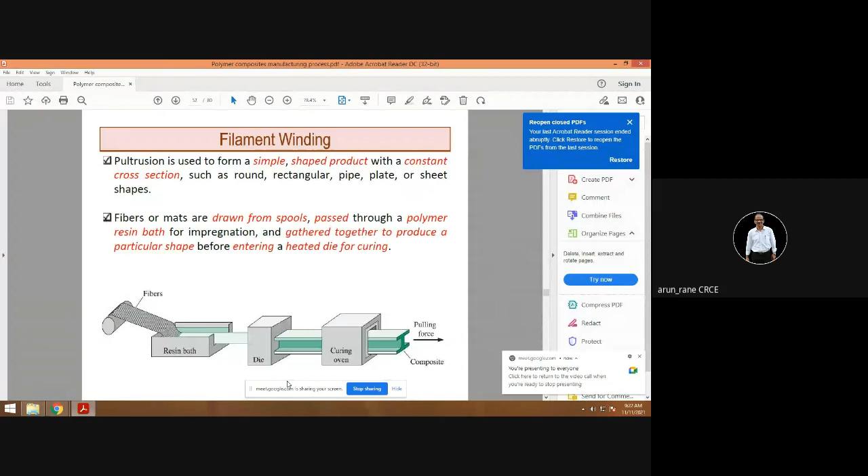Next is composites manufacturing. The process is pultrusion, which is a kind of extrusion process. The curing, that is setting up of the resin, is done almost immediately. So a continuous product, like an I-beam, can be made, since curing happens immediately or almost simultaneously. This process is called pultrusion, meaning pulled and extruded. It can subsequently be formed into any complicated shapes.

What is the raw material? The raw material is nothing but composite fiber. That is the raw material.

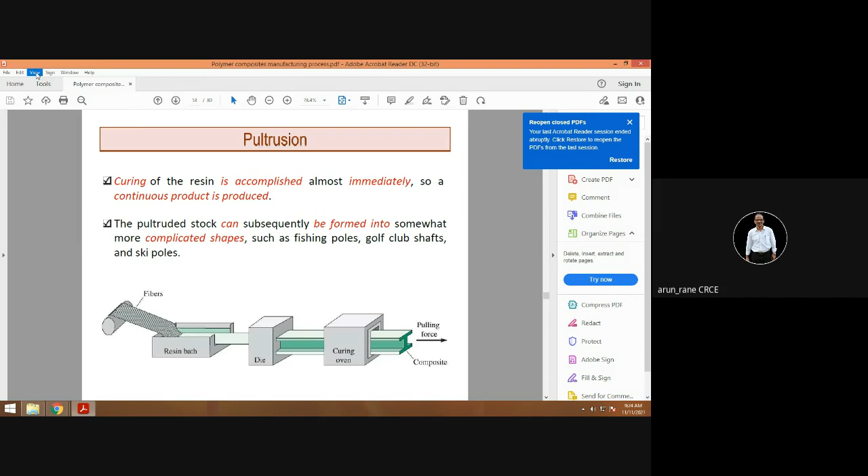Basically, it is a low cost and high volume manufacturing process, similar to the metal extrusion process. Somebody wants to join. It is a pull type of extrusion where the material is pulled, and it is basically employed for mass production.

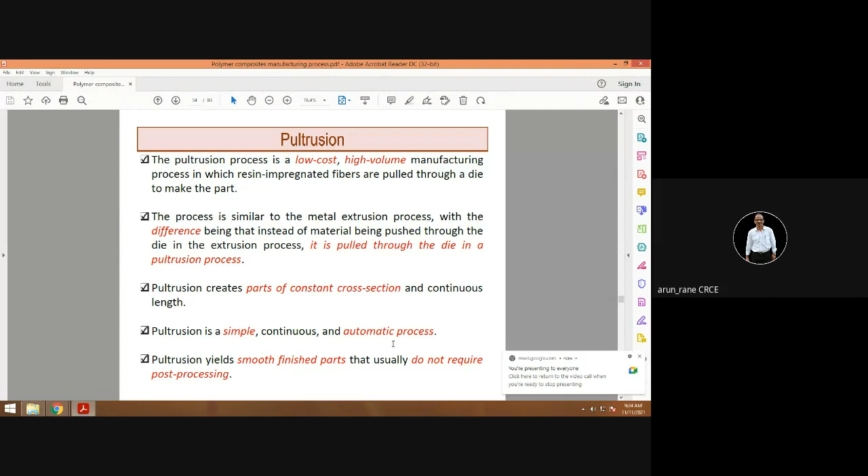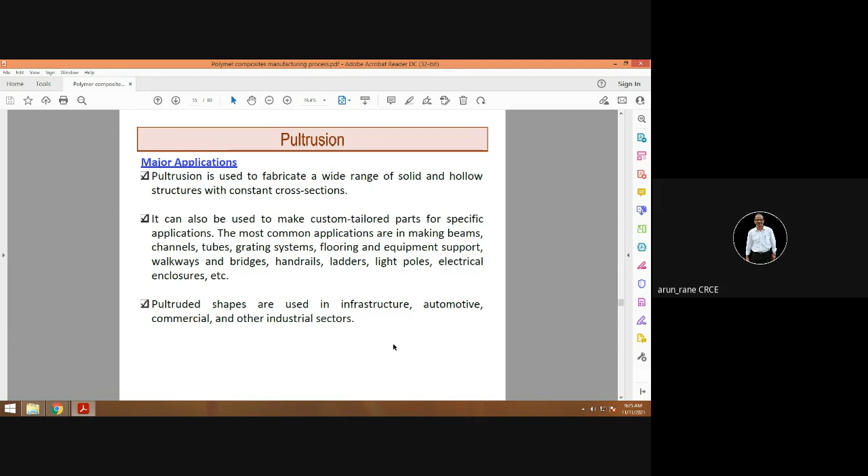Its applications are mainly what we are discussing, all the techniques we covered in the last lecture and today's lecture, for manufacturing of composites. Composite manufacturing means mixing two or more metal or metallic powders to get a hybrid material which is superior, having properties better than the parent metal. So it's a combination of two or three different metals.

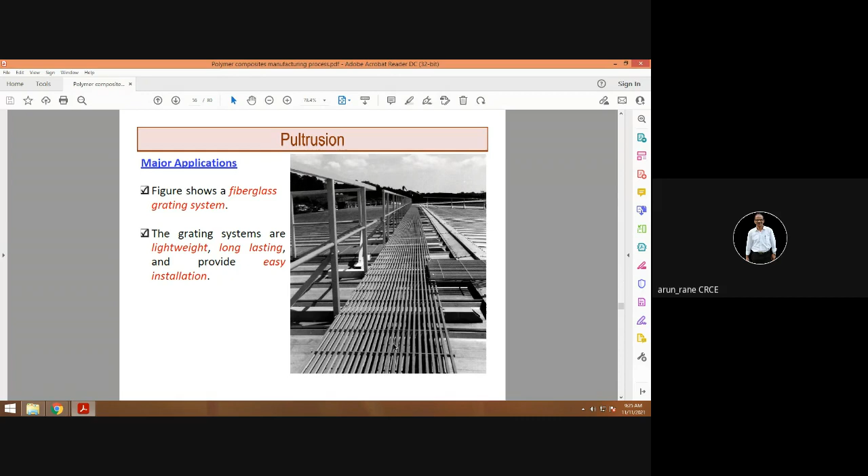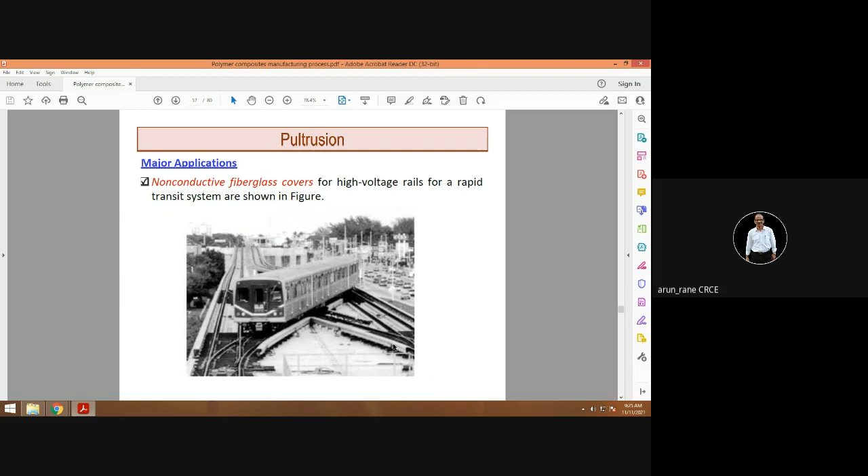This is what is called the grating system. This is a pultruded product from composite fibers. Fiberglass covers are also made by the pultrusion process, and it is non-conductive.

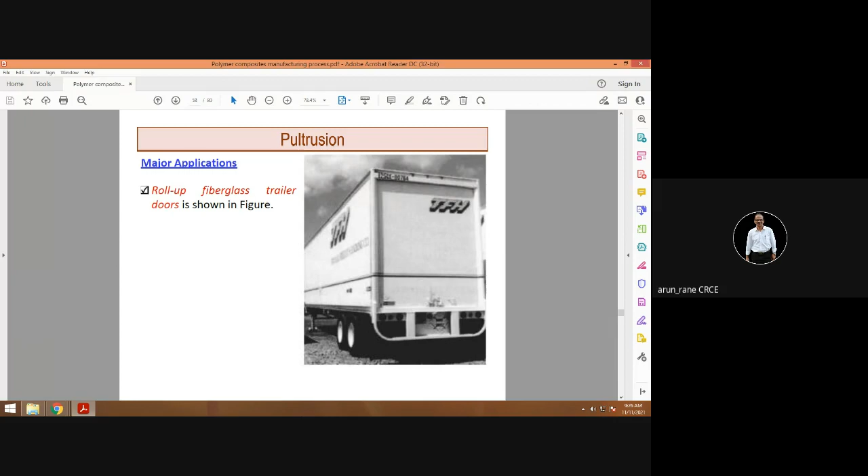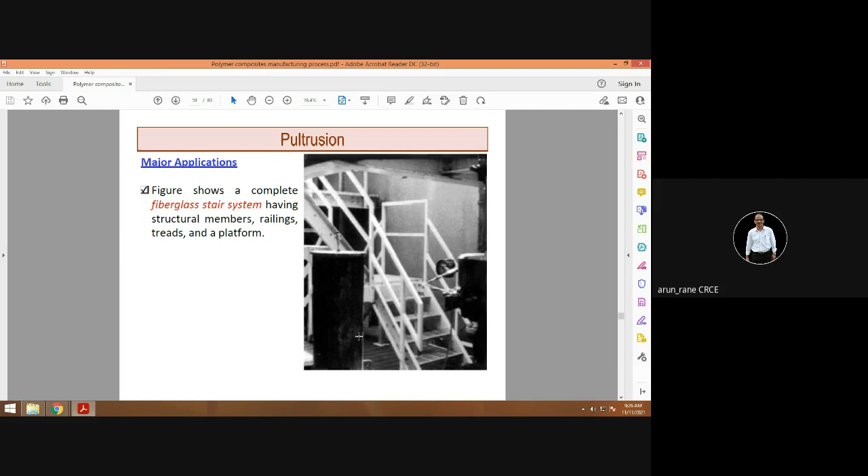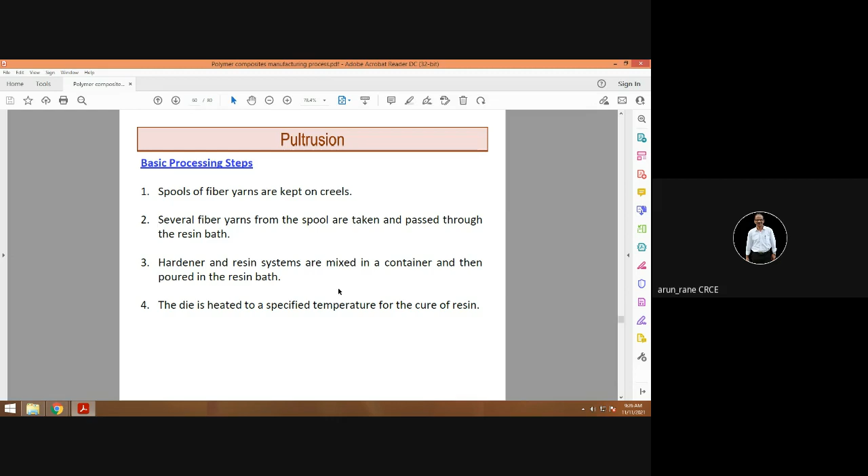Here some basic steps have been described. It has spools of fiber yarns which are kept on the creels. Then several fiber yarns from the spool are taken and passed through the resin bath. Hardener and resin systems are mixed in a container and poured into the resin bath. Then the die is heated.

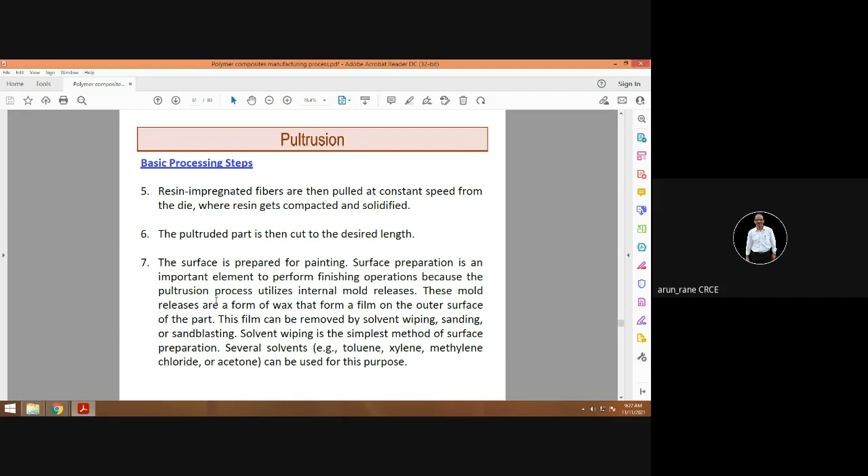Then these resin impregnated fibers are pulled at constant speed from the die. Once pulled, like say an I-beam, it is cut as per the required length. Then further finishing processes like painting, trimming of the flashing, etc. are done.

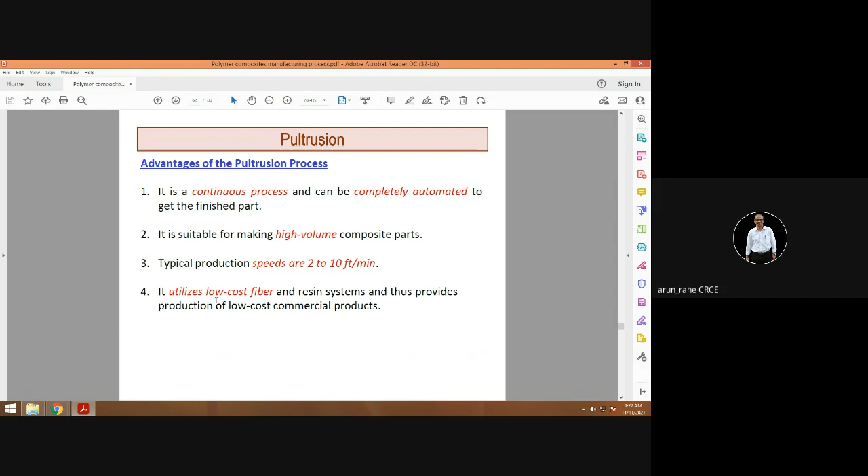So pultrusion is a completely automated process used for mass production, with speeds of 2 to 10 feet per minute, and it uses low cost fiber.

There are of course some limitations. Suppose if you have variable cross sections in the product, like an I-beam over 1 meter that changes to a C-section, or if the size changes, that is not possible. It should have a constant cross section.

Then very close tolerances in the range of say 50 microns cannot be produced. It has limitations for thin wall products, say parts of 1mm, 1.5mm, or 2mm cannot be produced - minimum thickness is 3mm. You cannot have tapered products or parts having drafts. It is not possible.

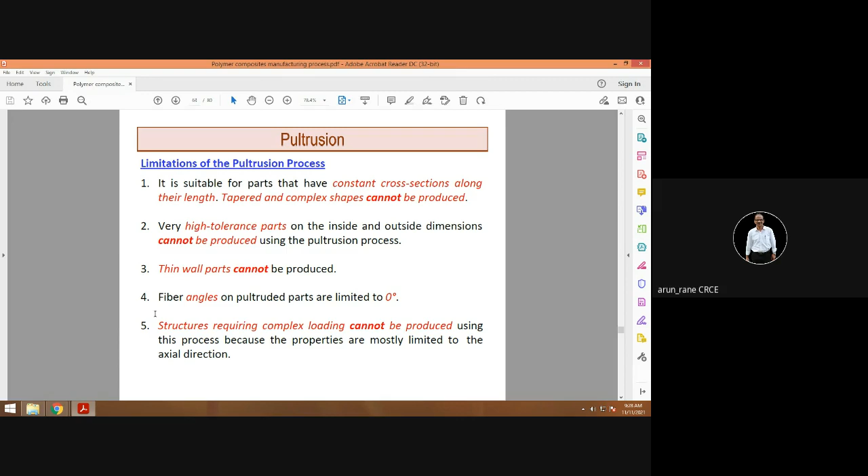This is the RTM process. You can just have an overview. RTM stands for resin transfer molding. So what are the steps?

First is a preform. A preform is used - a preform is a kind of raw material from which the product is made. So a preform is placed in the mold cavity. Don't go as per this title.

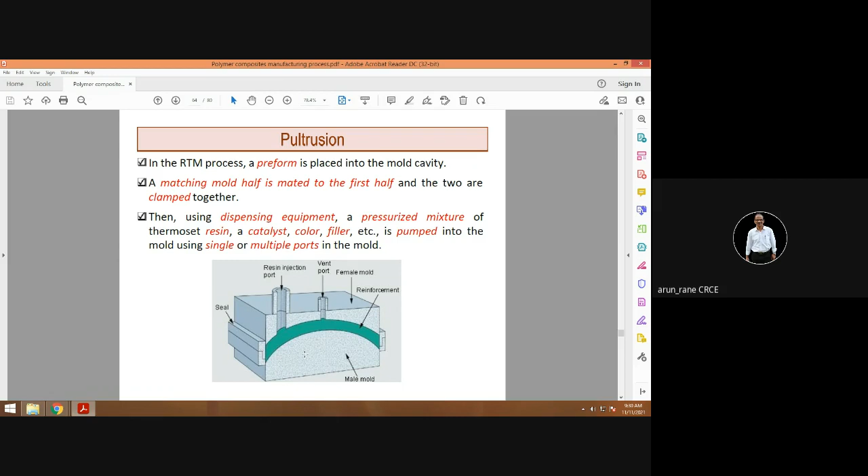So once the resin is poured, it is allowed to cure for 6 to 30 minutes, and after curing the part is removed.

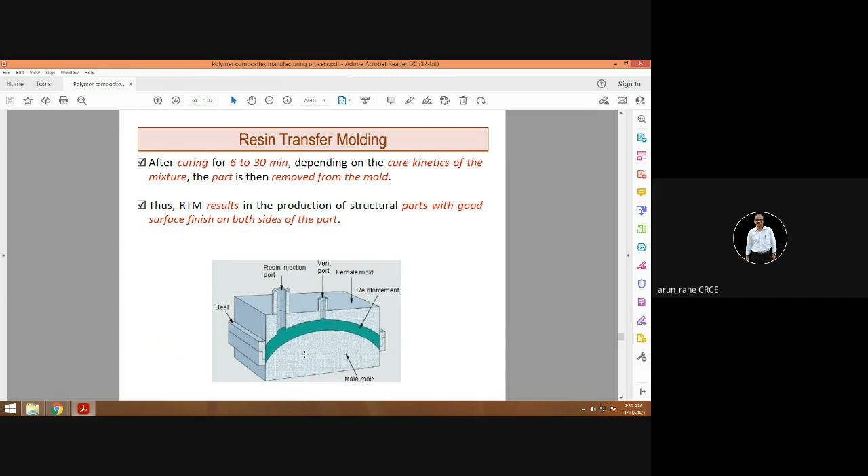This process gives a good finish, and is somewhat similar to injection molding, but injection molding is very fast, whereas this is a bit slow. Heavier cross sections can be produced here in RTM, whereas injection molding has limitations for heavier cross sections - meaning products whose wall thickness is more, say above 5mm - then you can go for resin transfer molding.

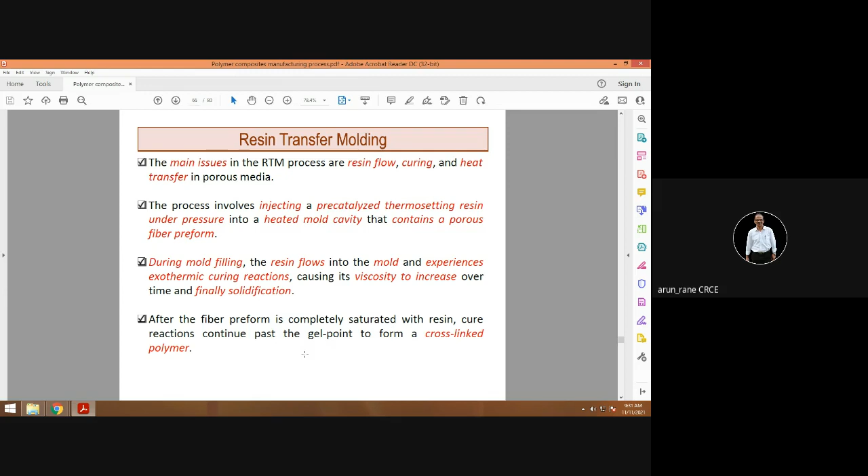So this dry fiber, what you can read here, dry fiber preform, that is nothing but the raw material.

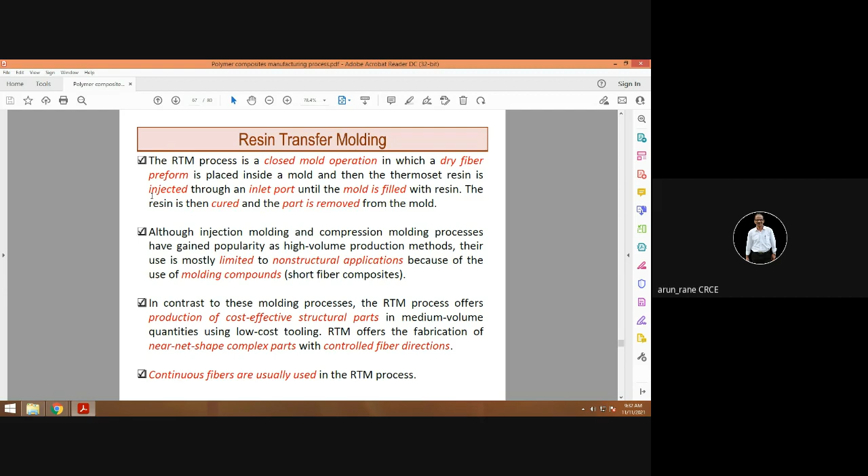So products like helmets are made up of composites. They are not made up of metals, because then it will be very heavy. Hockey sticks are again made up of composites because it has to be lighter, as well as it should have proper strength also. Bicycle frames, windmill blades, sport car bodies.

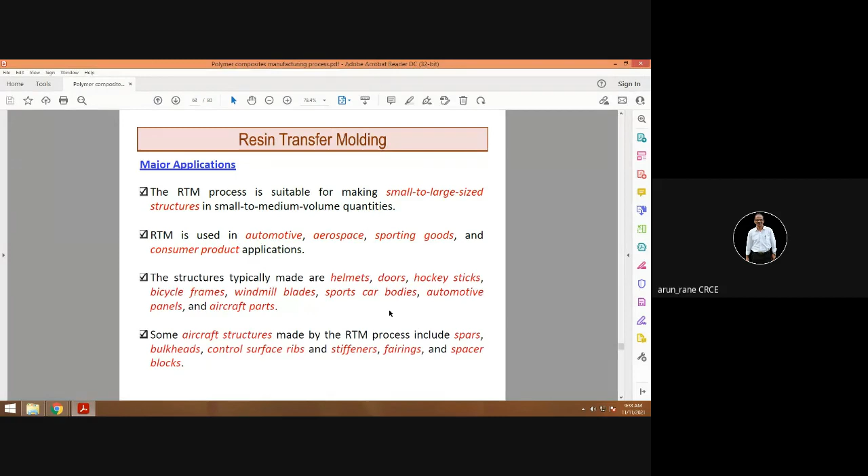So all these are made by the technique called RTM, that is resin transfer molding. Even it is used for some aircraft structures also.

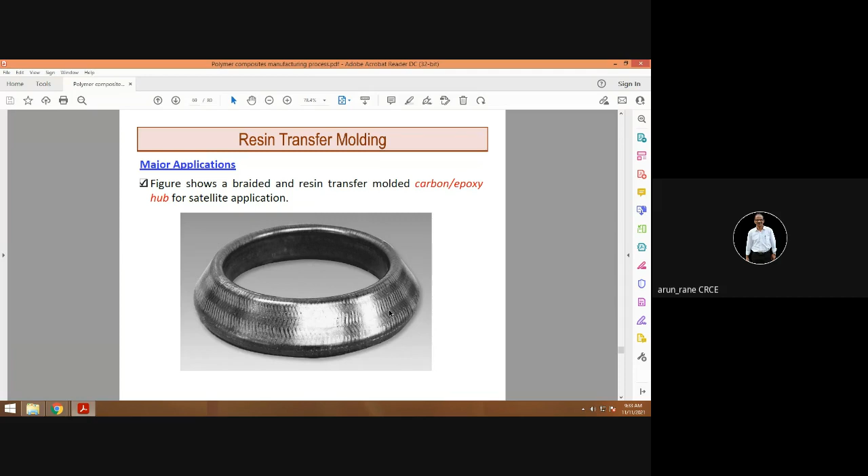This is an RTM piece, that is resin transfer molded piece, for satellite. These are some aerospace components produced by the technique called RTM.

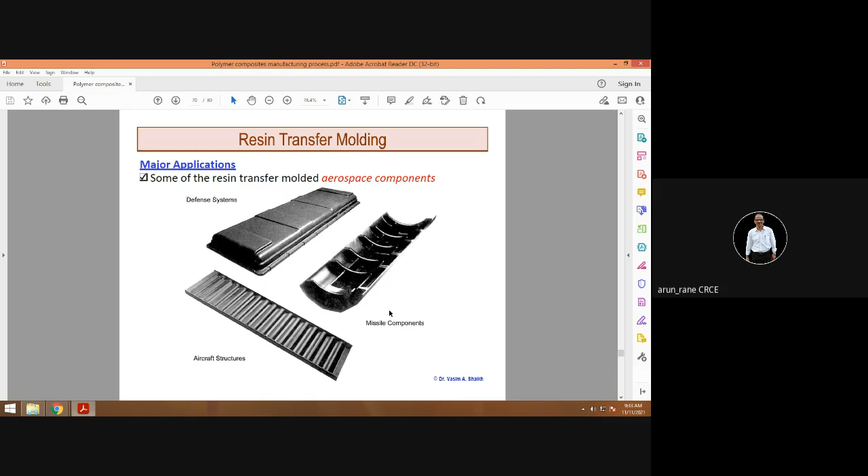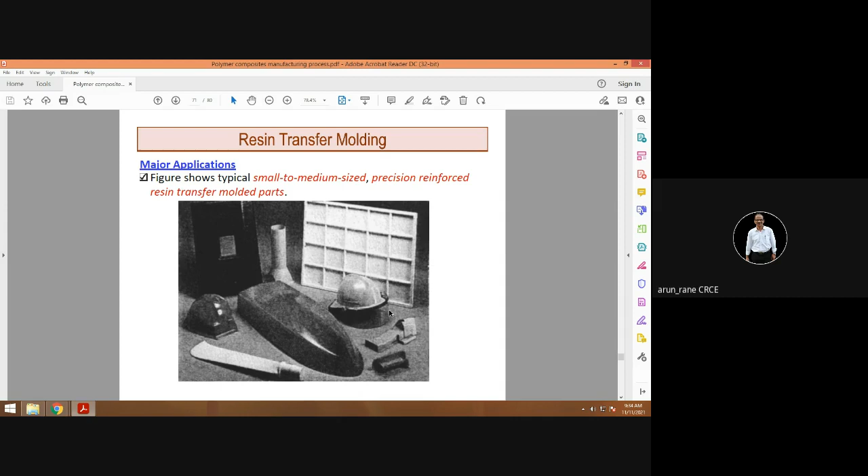These are again some precision resin transfer molded parts. Remember, normal injection molding is used for plastic, whereas RTM is used for composites.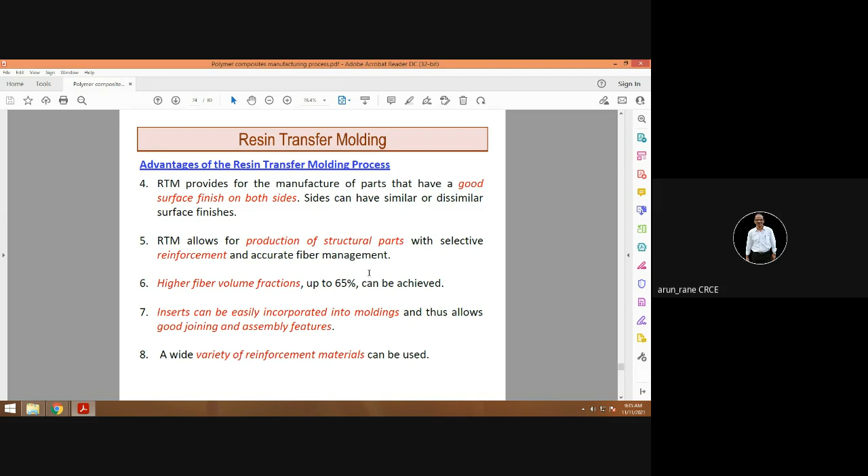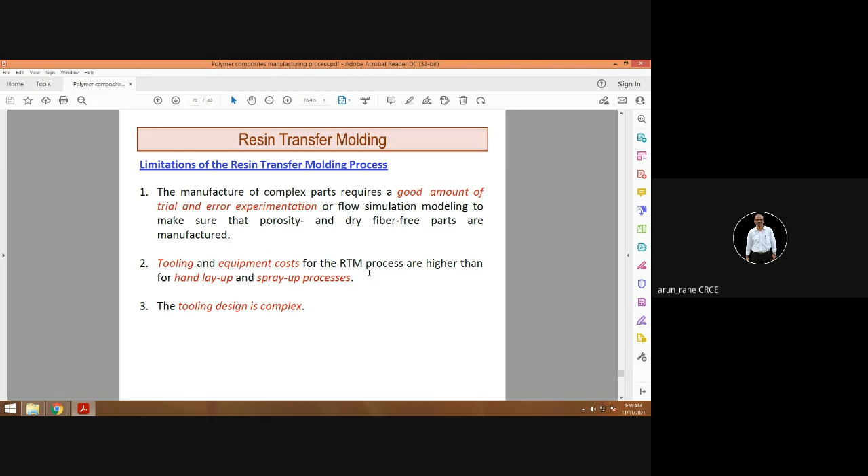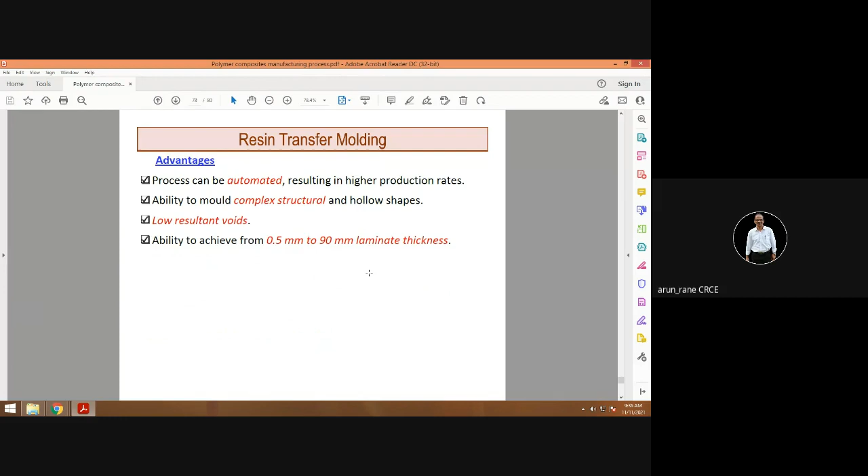It has limitations also, like since it is used for composites and composites have little higher melting temperatures than plastics which are injection molded, the cost of tooling in RTM is high or more. Tool design and tool material are costly, so tooling cost increases. Curing time is more, and generally it is not used for very complex or complicated parts.

So this was your composite manufacturing, and that is from module number 6. Module number 6 covers polymer processing, where we have learned what is thermoplastic and what is thermosetting.

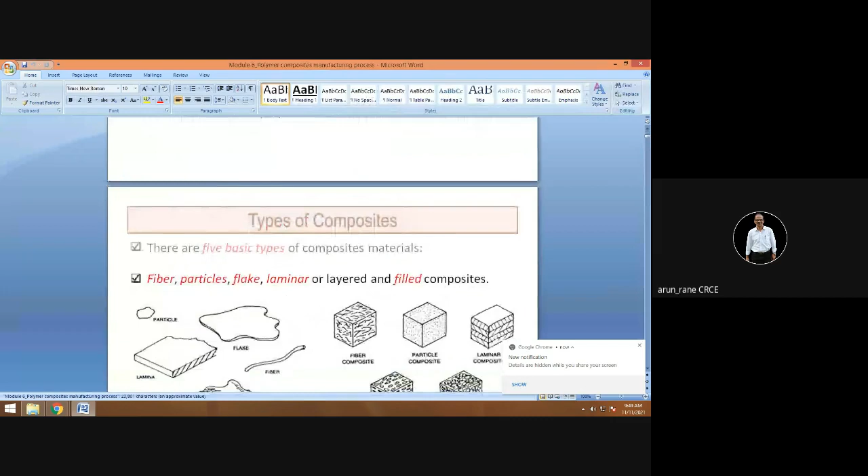Let me see what do I have in this Word file, polymer composite manufacturing process. So it will be helpful for you, it is almost the same as the PPT only.

I think somebody has joined. Anybody from your class is coming to the college? I think I saw some students, many students. Yes sir, some of them are in college. At college only? No, they are from different technical teams.

Okay, so let's go for non-traditional machining. In non-traditional, EDM is important. So before EDM, I'll just complete the other unconventional processes.

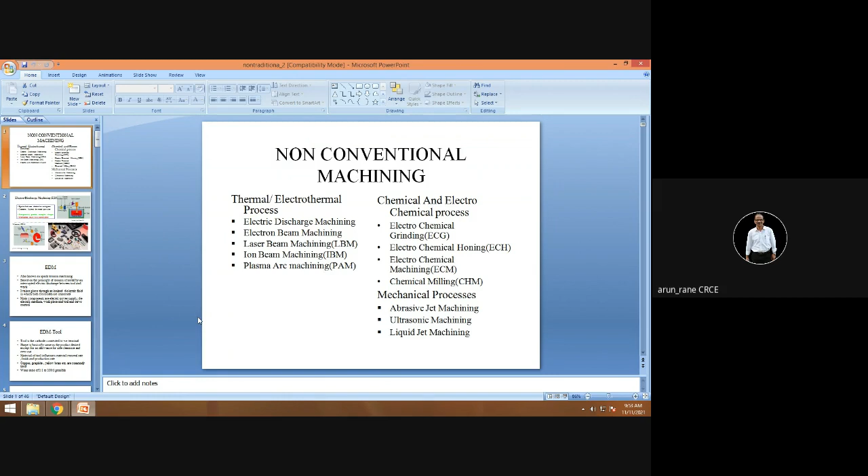So many of these processes you can see in IITs, BARC, TIFR - mainly these are for research and development. EDM and LBM are common though - EDMs, laser beam machining, you can see these processes every 5 minutes you walk in an industrial estate. These are very common.

We'll complete this first, which is less important from an examination point of view, but since it is mentioned in the syllabus, I have to honor it.

EDM is a sure shot question, 10 marks. Electric discharge machining. AJM, abrasive jet machining, etc., maximum is 2 marks. Abrasive jet machining, that is AJM.

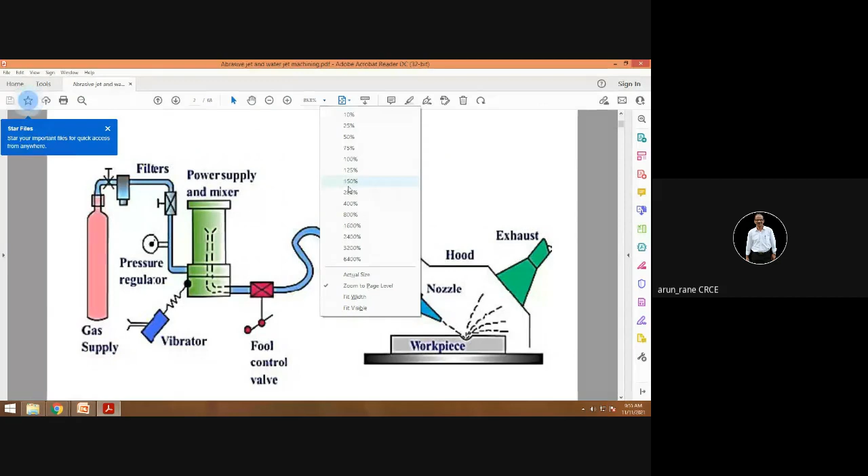This is the setup. By this time you might be knowing what is abrasive jet machining. Abrasive means the grains or cutting particles which are made out of aluminum oxide and are used in your grinding wheels. These abrasive particles have a strong erosive action, that is cutting action.

Silicon oxide is nothing but what you see in the beaches. So this is the workpiece, and say this small cavity is to be cut here.

How does the cutting happen? You have gas supplied under pressure, and you have a mixer in which your abrasives are mixed. With the help of this foot control valve, the supply of abrasive under high pressure gas can be controlled and directed towards the workpiece, and the cutting happens.

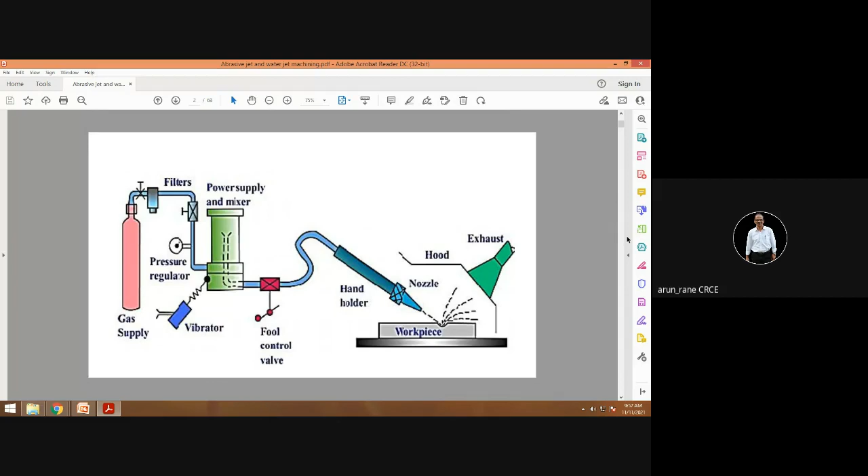This is the exhaust. Many times these abrasives fly off due to gas pressure, and these abrasives are poisonous and can damage your health. So these are collected through this exhaust. Remember, wounds or accidents caused by abrasives take a little more time to heal.

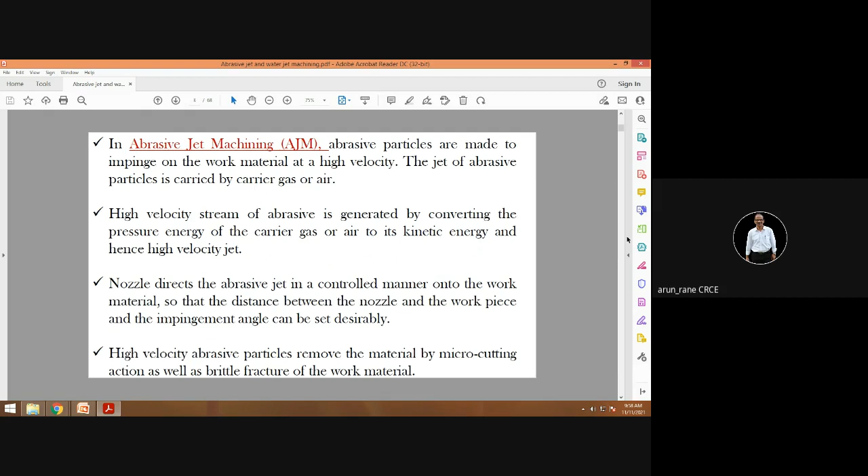The principle of abrasive jet machining is that abrasive particles, either aluminum oxide Al2O3 or silicon carbide SiC, impinge on the work material at high velocity. This is a simple diagram of the high velocity abrasive gas. Look at the velocity - 150 to 300 meters per second.

You have a nozzle having a very small cross section area, so the abrasive particle gains velocity and is directed toward the workpiece to erode, meaning to remove material. The material removal depends on the nozzle hole diameter, type of nozzle, and another important parameter - standoff distance, which means the distance between the workpiece face and the nozzle face.

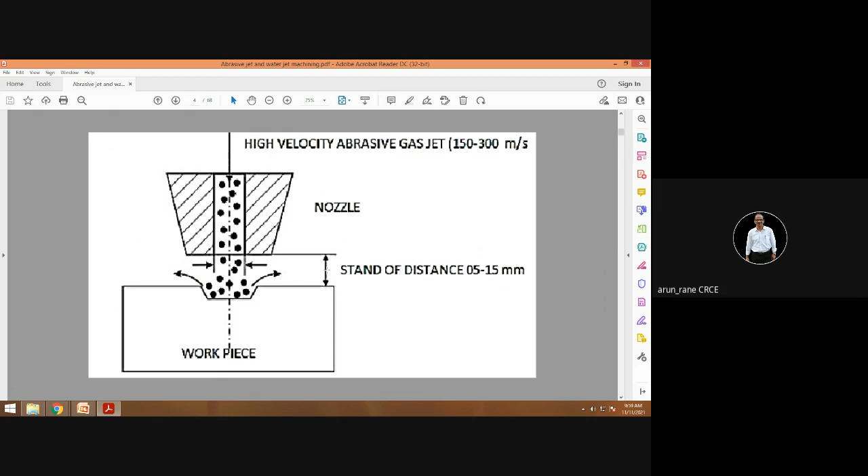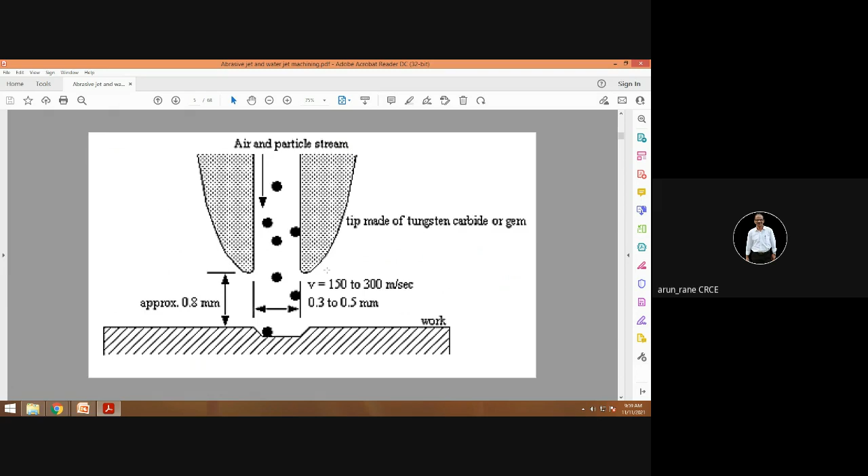Since the abrasive particle has an eroding action, the nozzle has to be made of tungsten carbide. Otherwise it will wear off the nozzle hole also, and over a period it will become bigger and the cutting action will be reduced.

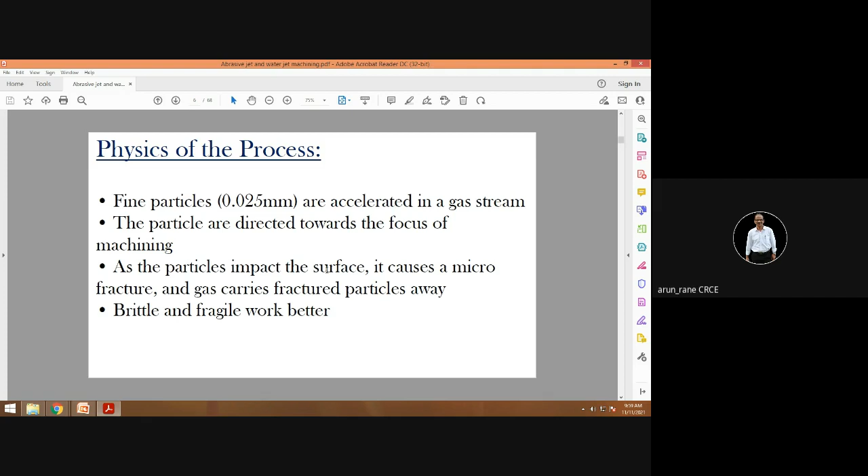The abrasive grains are almost 25 microns in size and are accelerated with high velocity. So there are two parameters - one is velocity and another is the particle size. It's like a bullet coming out from a gun - high velocity can damage the person.

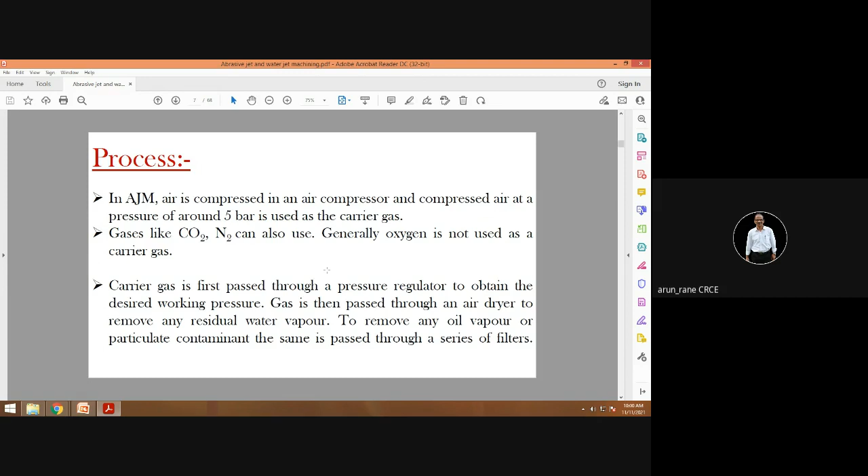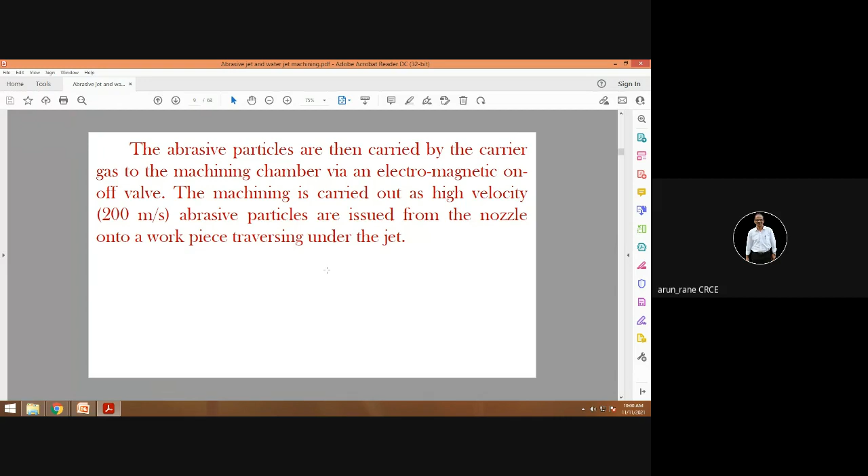This is how the equipment setup actually looks - you have a compressor here, then something to control the pressure, then the air coming out of the compressor has to be dry. It should not contain any moisture or water particle, because that will rust the subsequent equipment. So there has to be a provision of a drying unit or dryer.

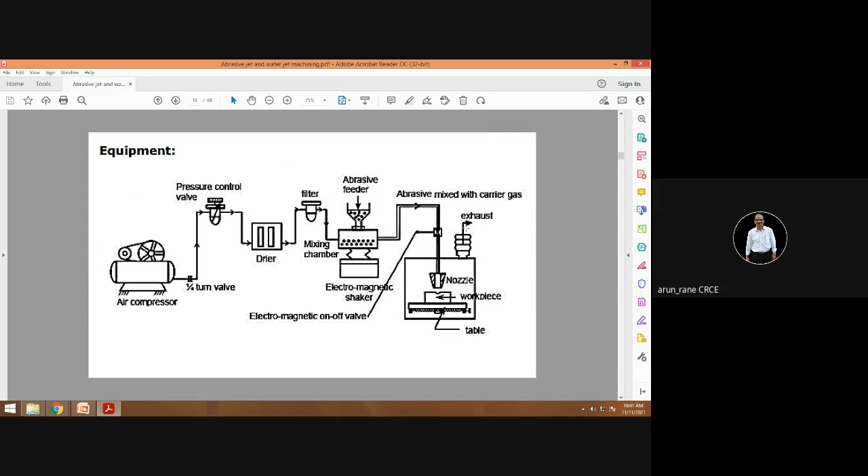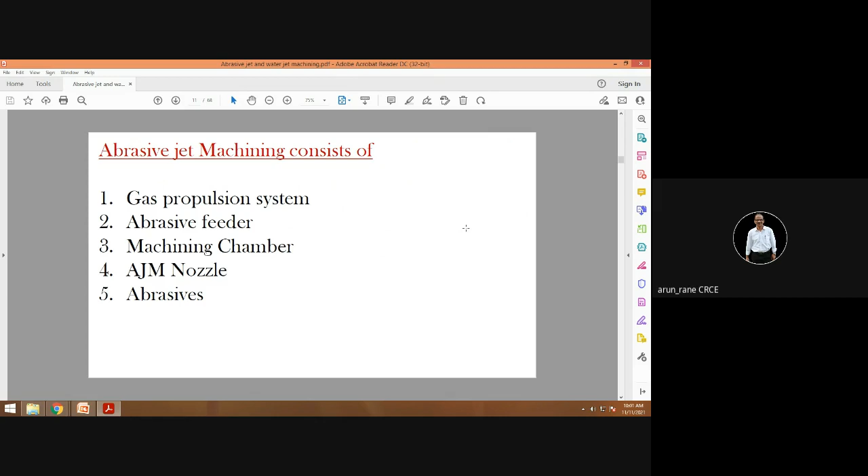Then air and abrasive particles are mixed and directed through the nozzle to the workpiece, with some kind of chimney and exhaust arrangement for removal of the flying abrasive material. So it is made up of a gas propulsion system, abrasive feeder, a machining chamber in which the workpiece is kept, a nozzle, plus of course the cutting material, which is the abrasive.

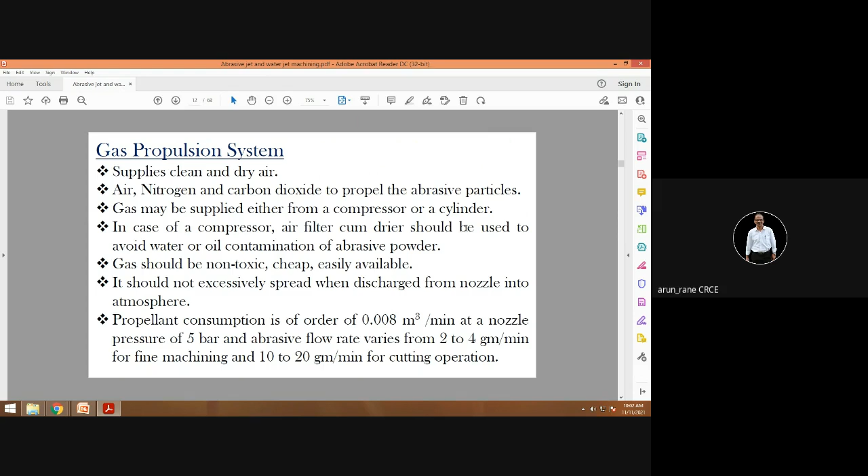The notes which I am giving, you can go through them. Since I have explained this, you will understand it. The notes are very simple—that is what gas propulsion system is. There is no point in reading them repeatedly, and there are no difficult terms.

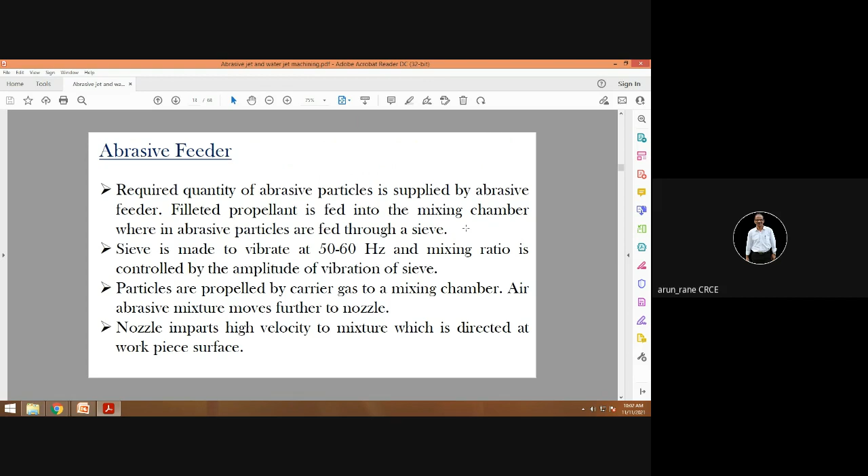Then you have the abrasive feeder. Feeder means to feed the abrasive—feed, like how a mother feeds her child.

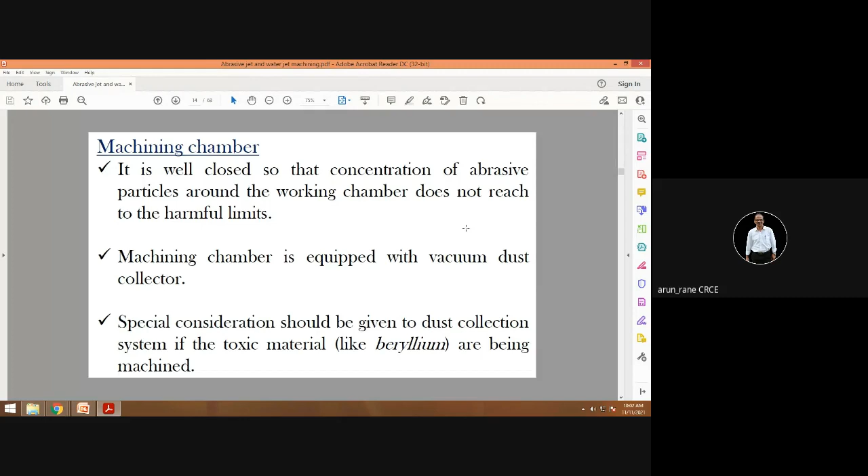Machining chamber means it has the workpiece and nozzle. Nozzle material is very important—it is made out of tungsten carbide, or it is sapphire. Sapphire is also a very hard material.

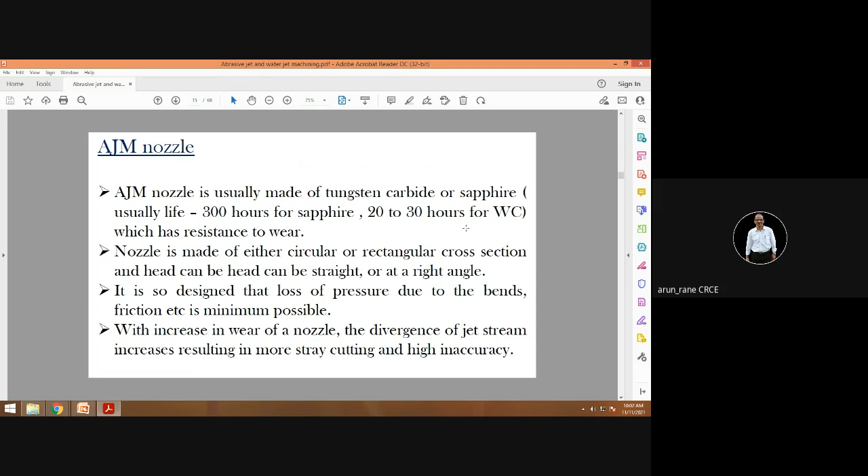Again, you have different types of nozzles—round shape, rectangular shape. Sapphire metal has the highest life.

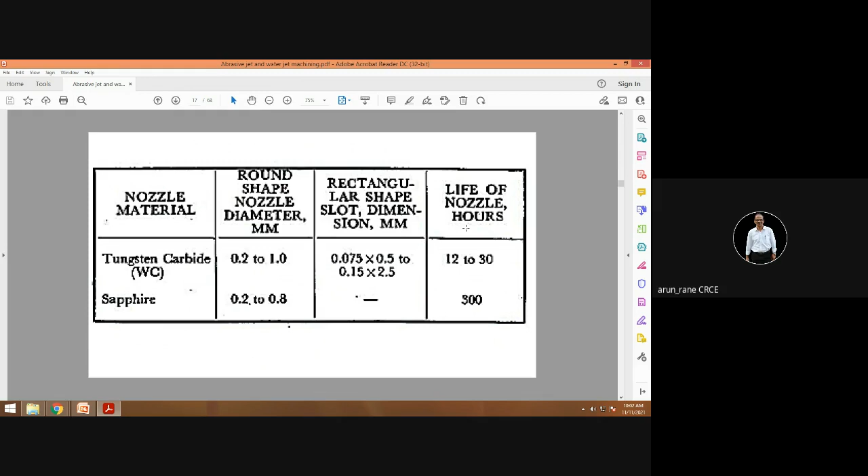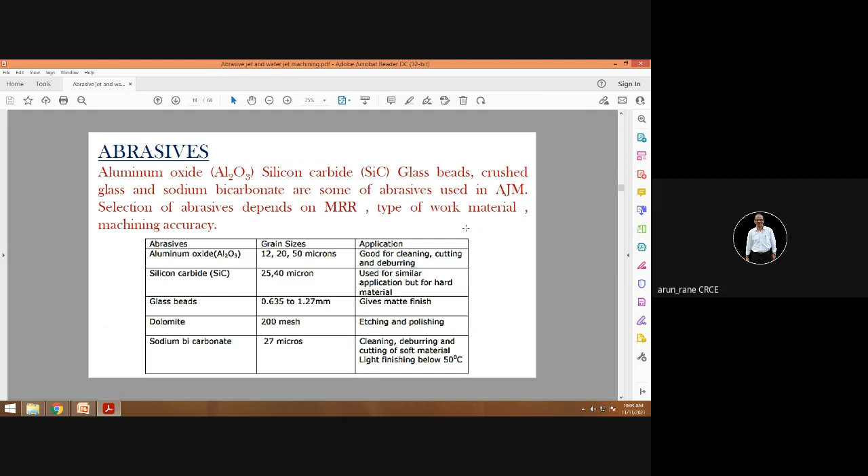Abrasives which can be used are aluminum oxide and silicon carbide. You can also use artificial abrasives like glass beads, dolomite, sodium bicarbonate. These are artificial, while the naturally available ones are silicon carbide and aluminum oxide.

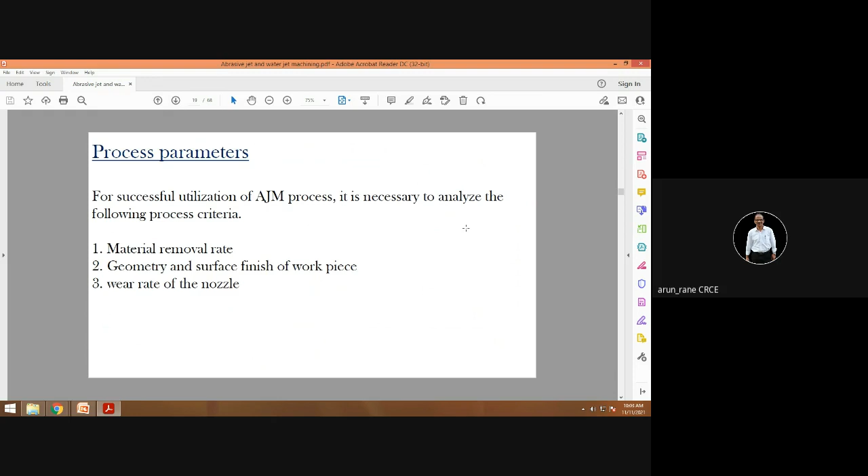There are mathematical models in abrasive machining, as in every machining process—how to calculate the material removal rate, how to calculate the surface finish you get, and how to calculate the wear rate. So there are formulas, or mathematical models.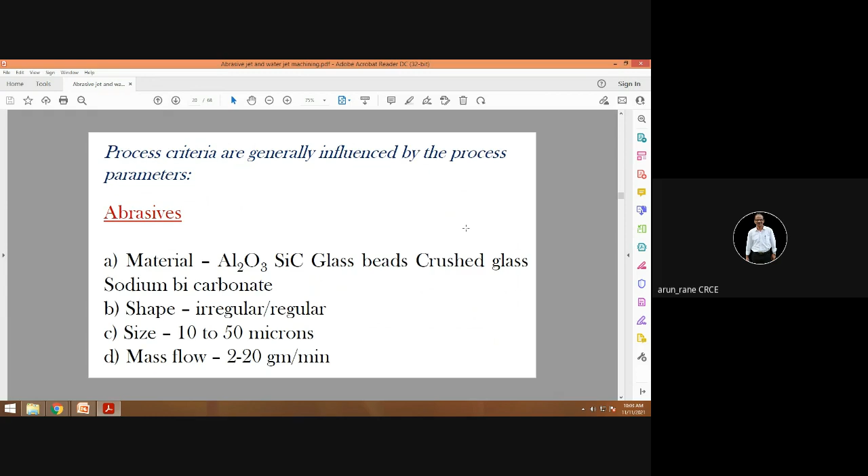Like aluminum oxide, silicon carbide, glass beads—what is the size? 10 to 50 micron. What is the flow rate? It is 2 to 20 grams per minute.

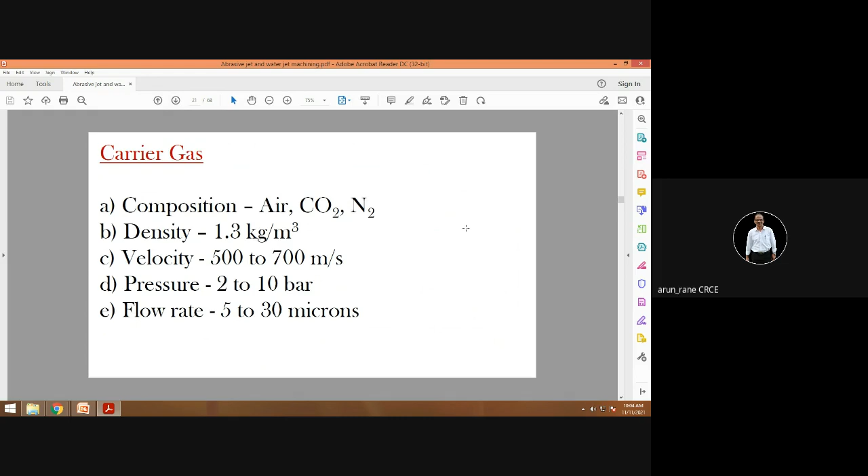What is the carrier gas? What should be the density? All these are very important parameters. What is the velocity? What is the pressure? What is the flow rate? What is the composition? What is the mixing ratio?

What is SOD? SOD is nothing but standoff distance. How does the standoff distance affect the material removal rate, and also the angle at which your nozzle is kept—that is called the impingement angle. Impinge matlab akraman.

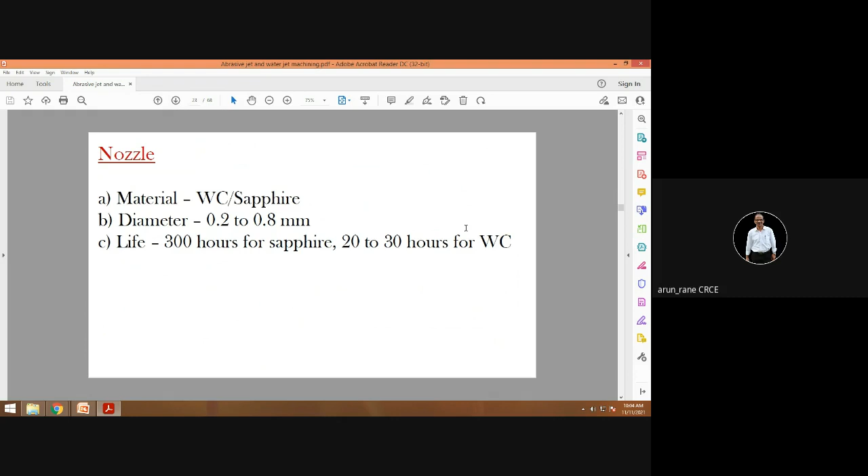So usually abrasive jet machining is a slow process. All non-traditional machining processes are slow. The biggest advantage of non-traditional machining, despite material removal rate, is that it is used for harder materials where conventional machining like lathe or milling machines fail.

So here in abrasive jet machining, AJM, you have MRR—see how low it is. It is 0.015 centimeter cube per minute. So you can imagine.

Once you know this material removal rate, you can estimate what will be the machining time required, and based on this, you can also quote what will be the cost of machining.

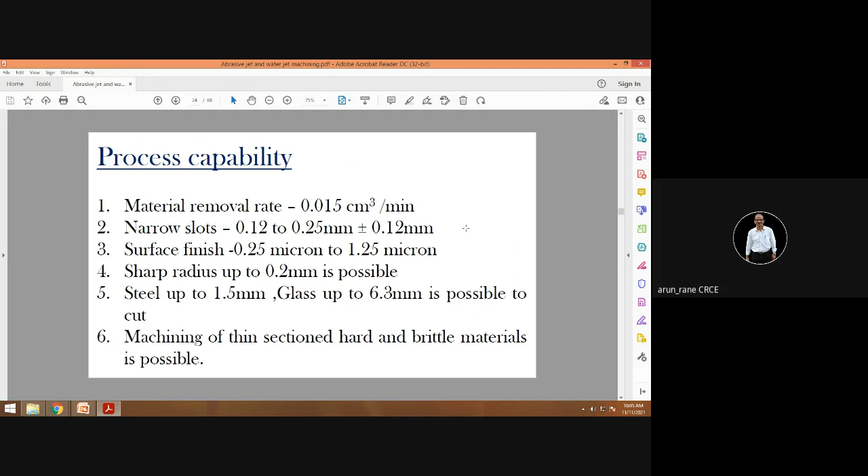Then surface finish you get ranges from 0.25 micron to 1.25, so you get a good surface finish. You can get sharp corners—not zero radius, but up to 0.2 radius. It can cut steel, glass, even hard materials like glass.

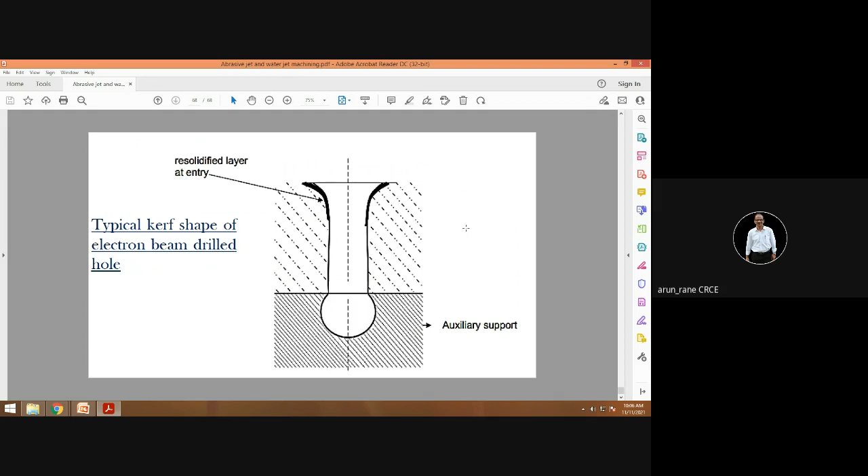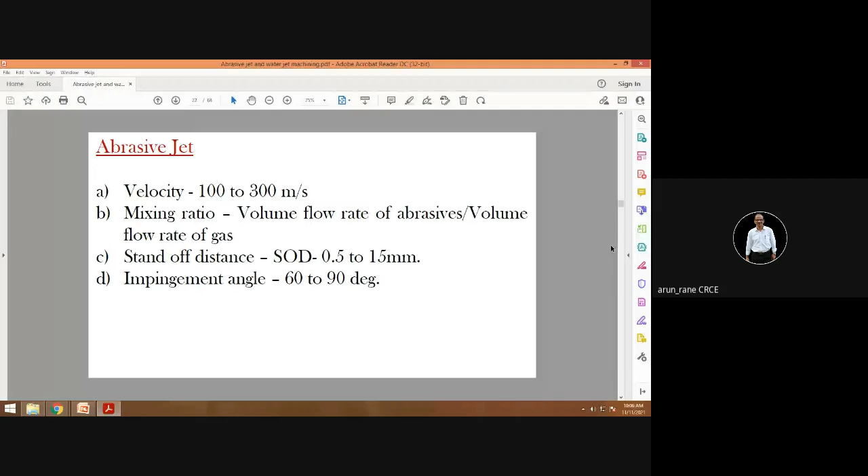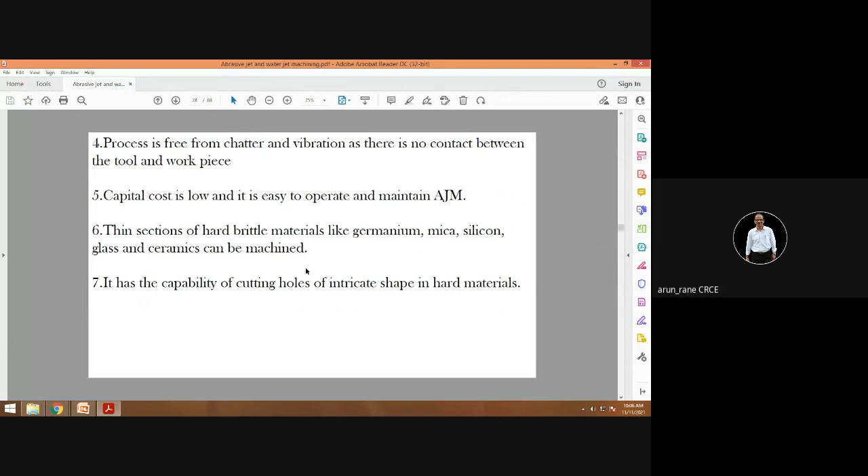And obviously you have some advantages and limitations. The advantage is that it can cut hard material and you get a good surface finish. The limitation is that MRR is less.

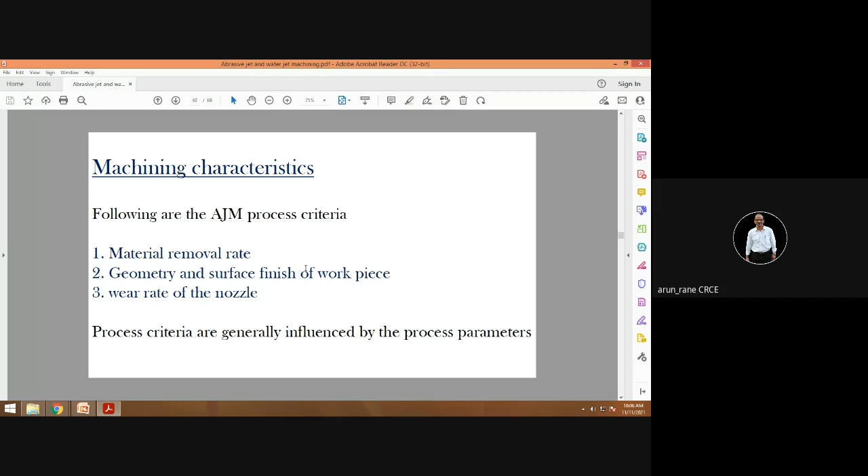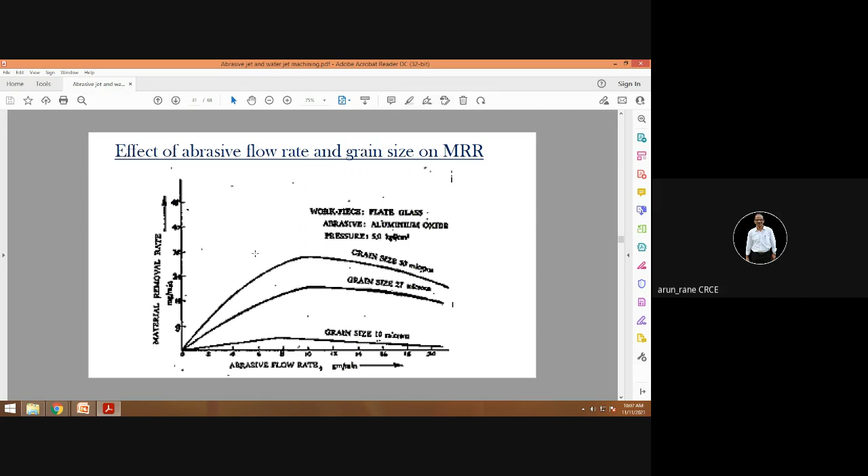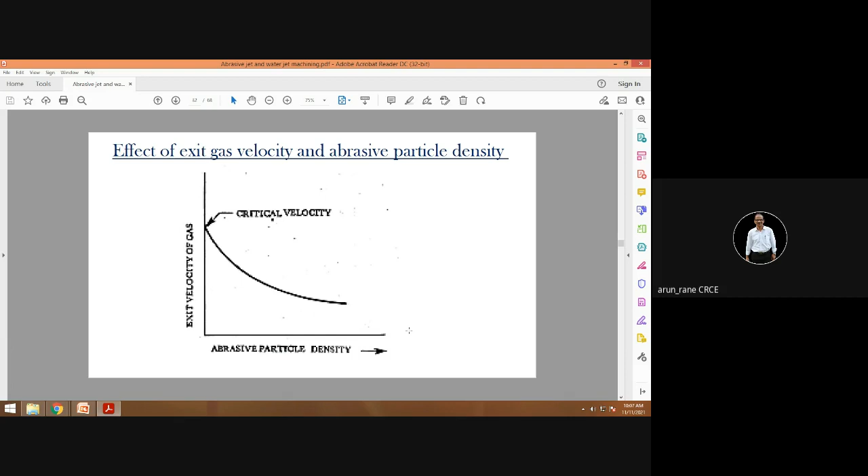This is a graph of exit velocity of gas against abrasive particle density. There are so many factors, and it's again a good area for research—how does the gas velocity affect the MRR?

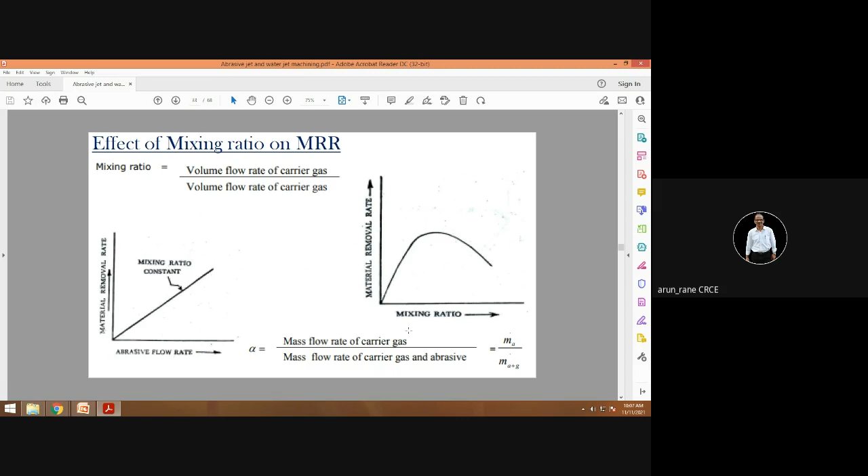Here is the relation between MRR and abrasive flow rate, relation between MRR and mixing ratio, and nozzle pressure.

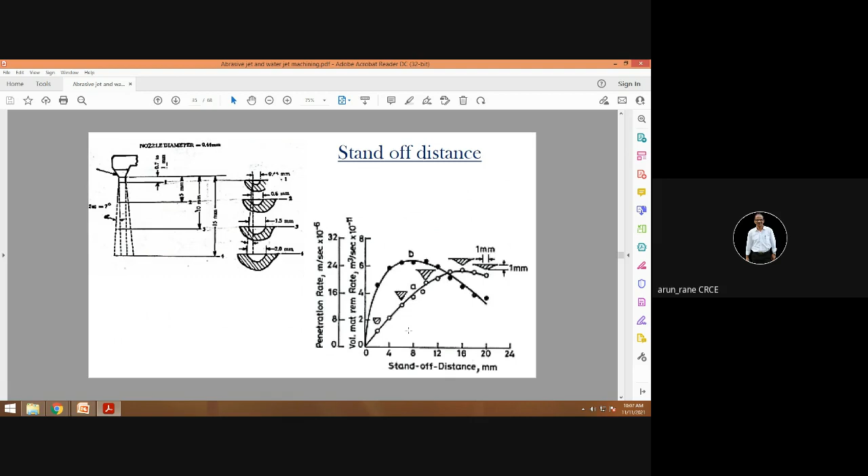Then how does the standoff distance affect things? Standoff distance means the distance between the face of the nozzle and the face of the workpiece. If the nozzle is too close or quite away from the surface, how will it affect the material removal rate? Okay, so we'll stop here.

Then we'll go for abrasive water jet machining, that is AWJ.